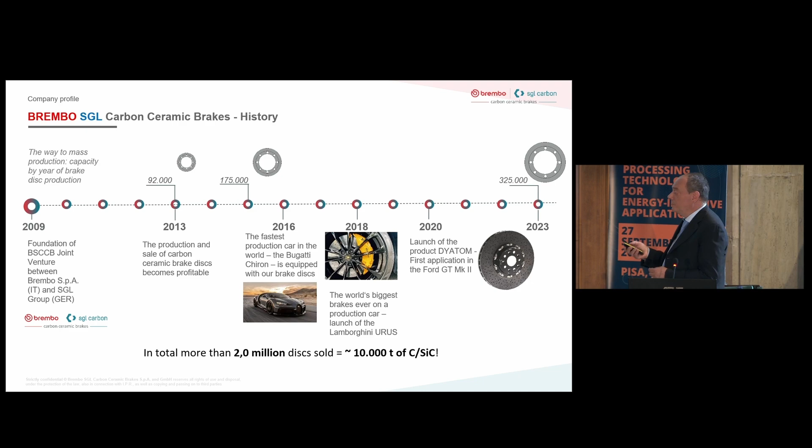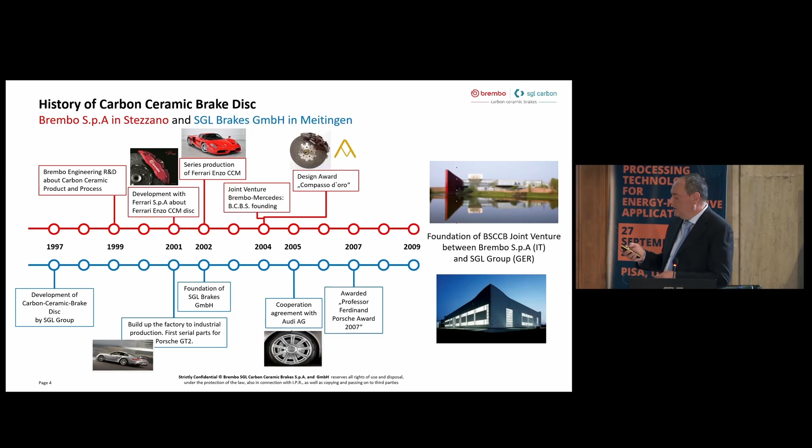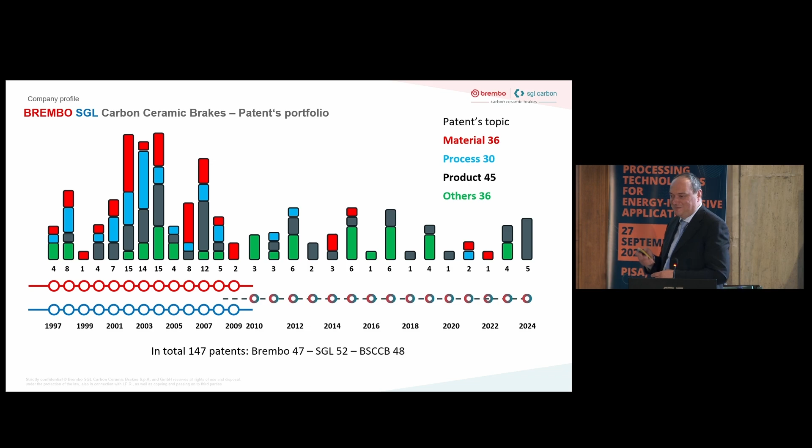Okay, where we are: in Italy, in Stezzano, that is close to Milano, Bergamo, and Meitingen, close to Augsburg, Munich. So these are the two locations. Just to mention, 700 people are working on this material, so not a small company. Our customers are mostly the most important car manufacturers. Obviously, just the top vehicles, and just Ferrari has carbon ceramics as first equipment on all the Ferraris. The others are an option.

Also for Porsche, if you see a Porsche with a yellow caliper, it means that there are carbon ceramic brakes. The yellow caliper is that. So it means if you are rich, you have a yellow caliper. If not, you are a poor rich.

Okay, why do you have to apply a carbon ceramic? First of all, because of safety and performance. Those are the two. Safety is reducing stopping distance due to a higher mu level, more stable, no fading after bedding, longer lifetime. So this is the must.

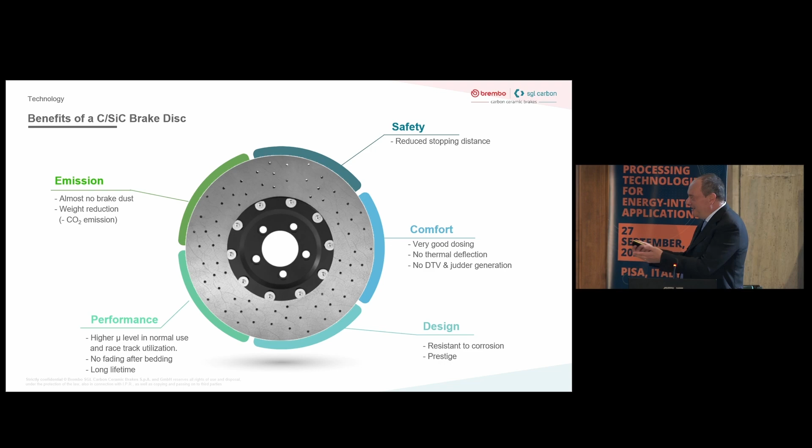And then comfort. DTV is a strange acronym, the disc thickness variation. You have to measure the thickness of a rotor in a turn, and it should be lower than 20 microns. 20 microns over a turn of 400 millimeters, so it's nothing. And if you have DTV, you have vibration during braking. For a Panda it's not a problem, but for a Ferrari, for a Porsche, yes. So it's really important.

Okay, I move to market requirements. Before showing you some news about how we produce it, I want to give you some information about the requirements of the market, because to have a product, as I said, research is important. Then I mentioned Ferrari and Porsche, which were the drivers for the development, because if you don't have a customer, you can have the best idea, but you cannot sell it. It still remains an idea. So fulfilling the market requirements is absolutely mandatory.

And which are the market requirements? Lightweight. We have seen that the evolution will be electric cars. Electric cars have higher weight, but also higher power. So at the end, kinetic energy is increased, and we need to lighten the weight as much as possible. An example, these two Porsches, Turbo S and Turbo, 680 and 550 HP: the weight of the brake system per HP is 60 grams instead of 100. So 40% reduction of the weight means 25 kilos less in the car. And not just weight, but weight on the wheel. Having lighter weight, you can turn better and so on. So it's not just the weight.

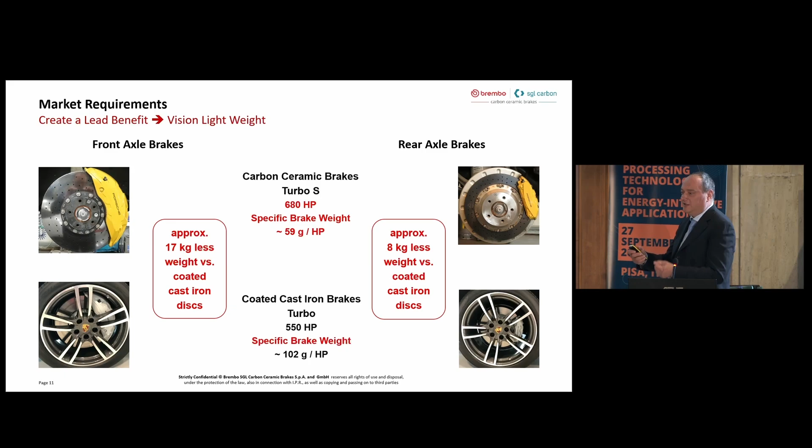Then, what is the use? Standard use or severe use? Carbon ceramic brakes like ours can handle all of these in the same way. So you can drive slowly in the traffic jam enjoying the landscape, but also go to the track and then back without any problem. Whereas if you use cast iron, you have a lot of problems. You cannot move from this to that without changing the brakes. Okay, so the request is to have an excellent product for properties, cost price, and friction couple. What does it mean?

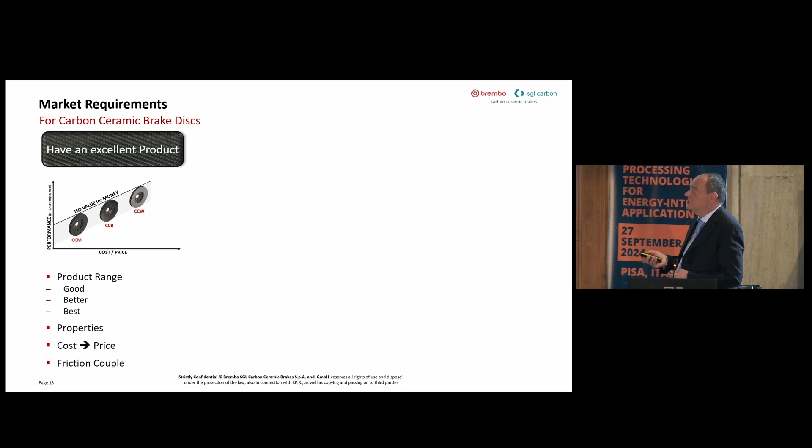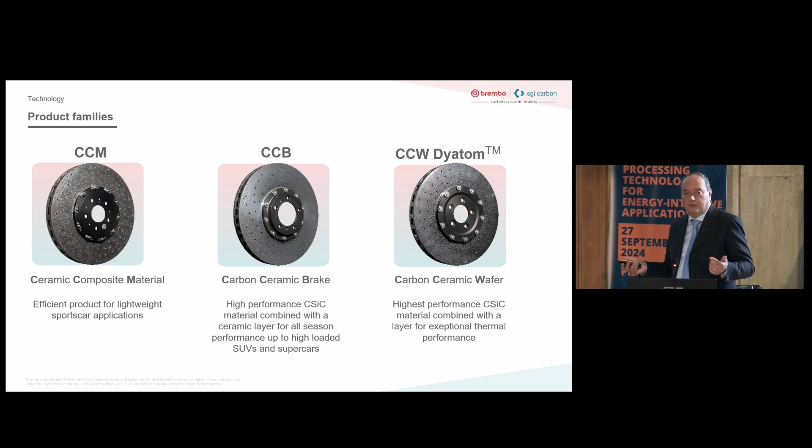To arrive to the request of the market, these two, CCM and CCB, are the starting point of Brembo and SGL. They are different, we'll see the differences soon, and then we arrive to the new CCW Dyatom, because the requirements from the market are increasing. As I said, electric cars need more energy dissipation, which means higher stress on the parts, mechanical stress, and higher heat to be transferred to the air at the end.

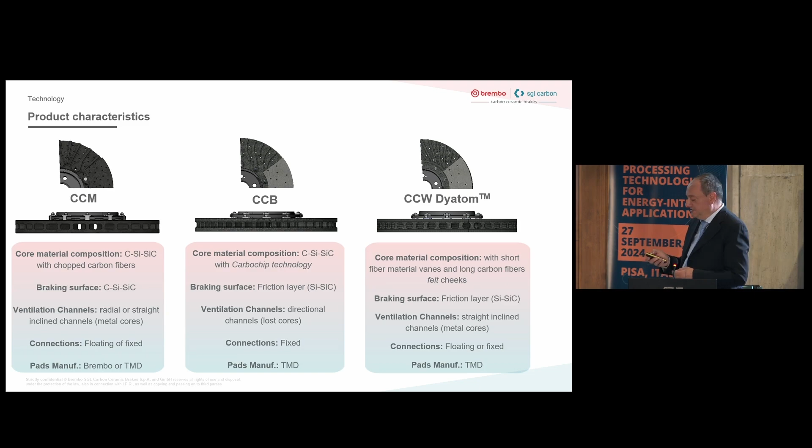A qualitative distribution of price and performance is like that. For sure, as I say, CCM is cheaper because it's the simple way to produce it. No friction layer, metallic pins, so everything is related to reducing the cost. If you want something better, you can arrive to CCB, even more, CCW, and the price is increasing, but performance also follows the cost. So it's not linear, but we have this trend. If we increase the performance, we have to pay something more.

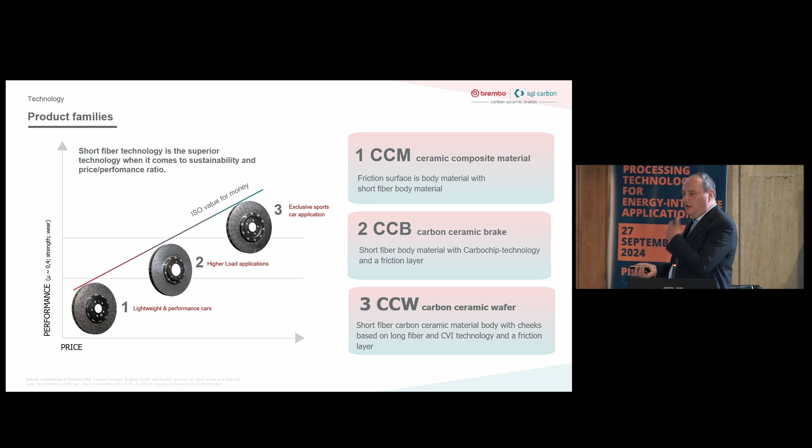Then, friction couple. What is important is that the brake system is not just the rotor. There are also pads and caliper. Especially the pads are really important; here is an example. The same brake rotor and 3 different pads. You can see the behavior in a not so difficult type of braking, a fading test at 0.4 G. Normally you don't brake at 0.4 G, it is like a panic stop, but it's nothing for this type of rotor. From 100 to 5 kilometers per hour.

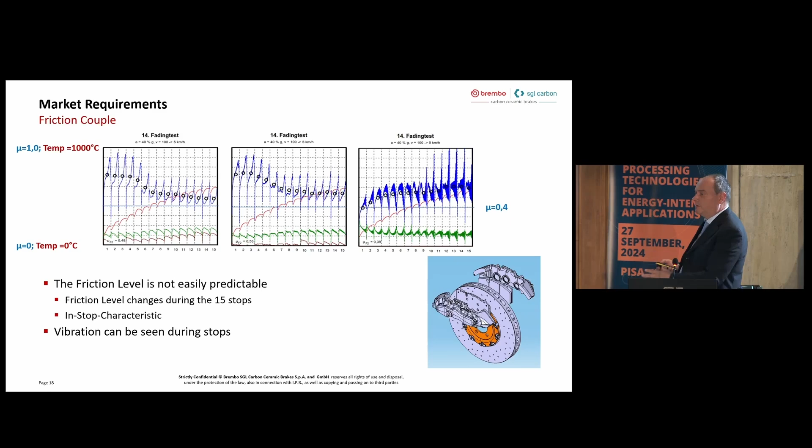So you are on the highway and you have to stop. This is more or less this type of braking. Repeated 15 times, so you can see the increase of temperature is the same. And the behavior, this blue line is the mu, the coefficient of friction, is completely different for these 3 types of pads. So pads are the other part that must be developed together with the rotors. Again, if you can maintain 0.4, this line, it is a good level. So this is what we want to have.

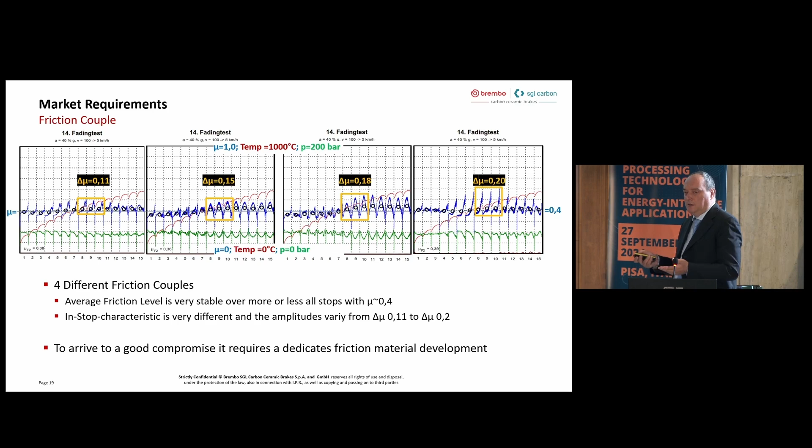Okay, next part for the market request is support to the application. I mean, we have to develop a rotor knowing the energy of the car, the mission of the car, which is the use we want: more related to street use or track use and so on. And so simulation of this part. Simulation of thermal and thermomechanical behavior, let me say, is a given. For sure, we have to design to fulfill the requirements of these parts.

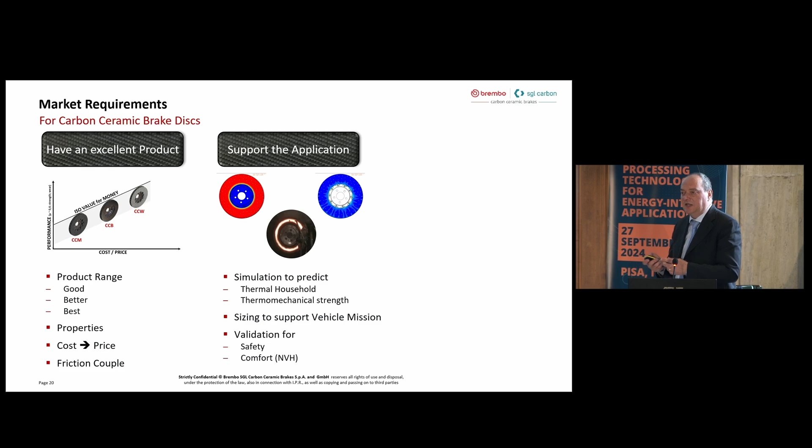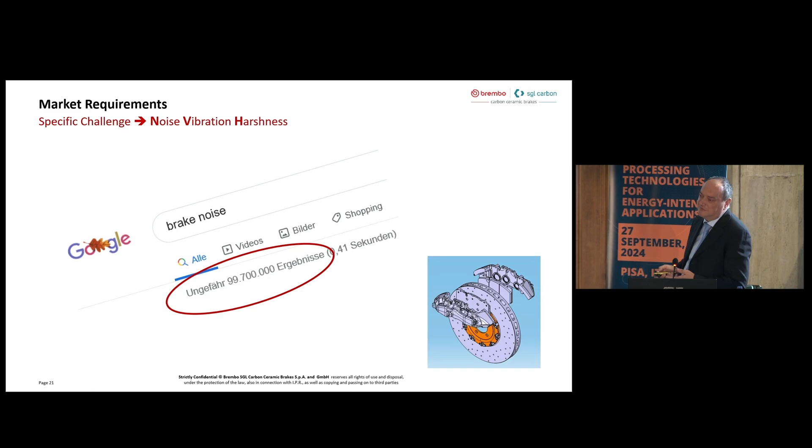What is more important is this part, safety and comfort. Safety, as I said, is the design knowing the mission of the car and the strength of the material, and we combine them to obtain the final design of the rotor. What the market requests more now is comfort. If you Google brake noise, 100 million answers about brake noise. So it's something that is of interest. This is the spread of our hearing and what we have, this type of noise.

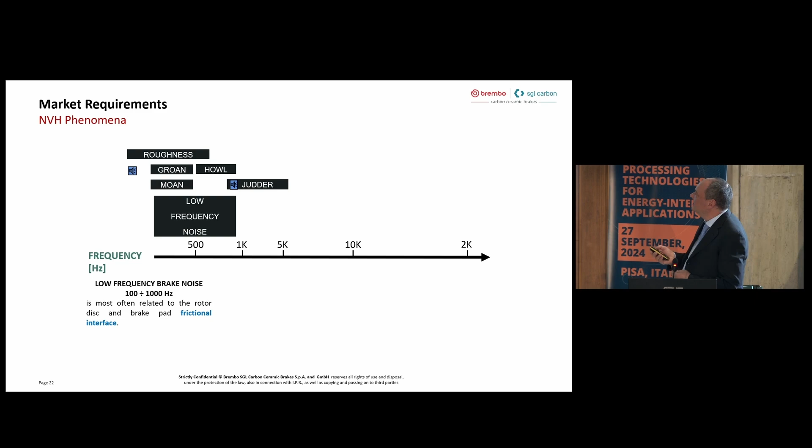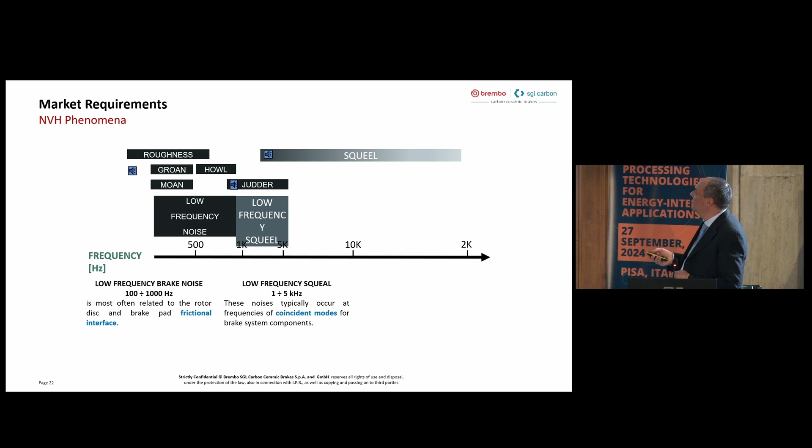Then we have the judder. It's nice to hear. And then we have the area of squeal, low frequency, and then high frequency. Okay. If you brake like this, having spent 200,000 euro, you don't like it. And also wire brush.

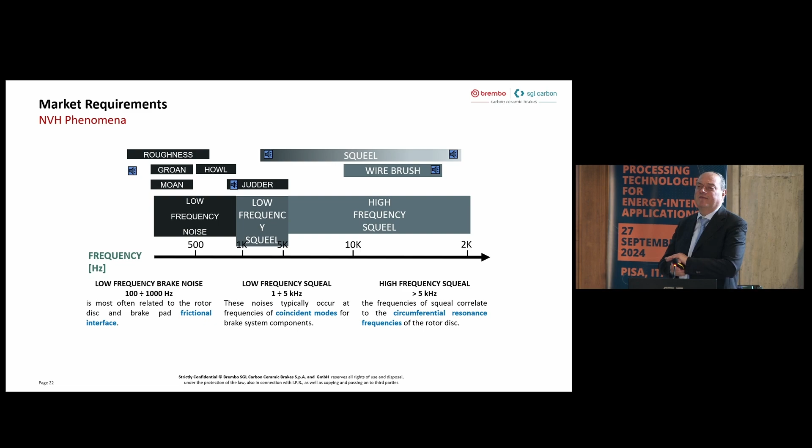Okay. So this is a request of the market. We don't want to have noise. No, just silence. Okay, so we can have also the orchestra, but I think it's clear what is the request. How we approach this with the simulation to understand the origin of the noise. So we have a lot of analysis on that, and so also the design is a part of it.

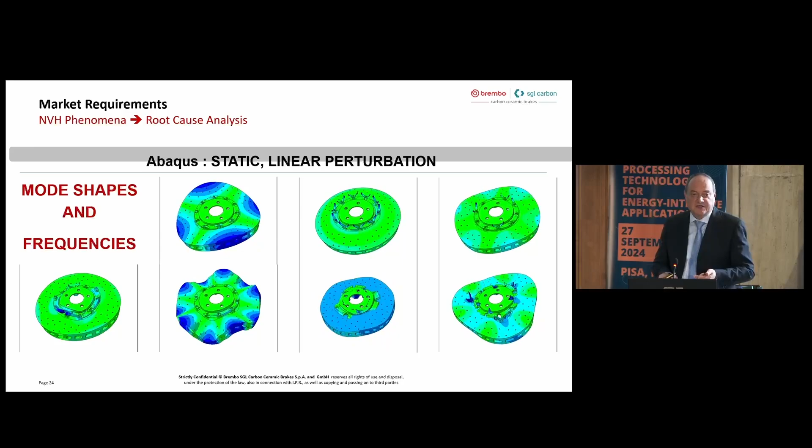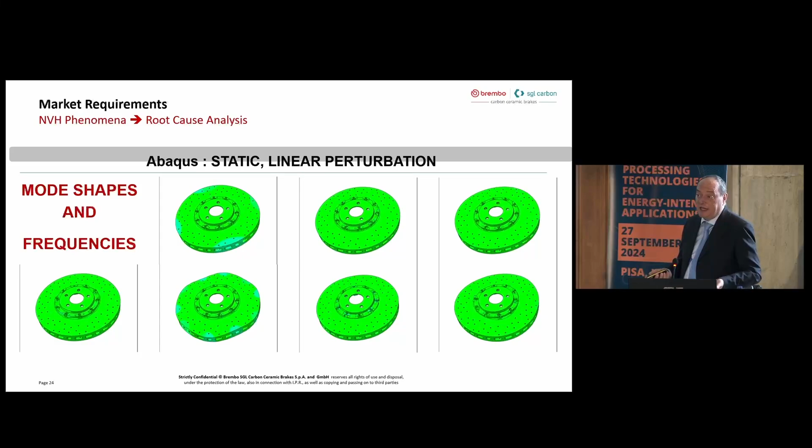So we design for strength, dimension of pads, because we have seen the effect of the pads. We are not obliged to use a certain area for the pads, but also take care about the vibration modes, and can we solve this part by design, by including different type of ventilation and so on. This is a part of our knowledge, and that's what we can offer to our customer. So this is the part.

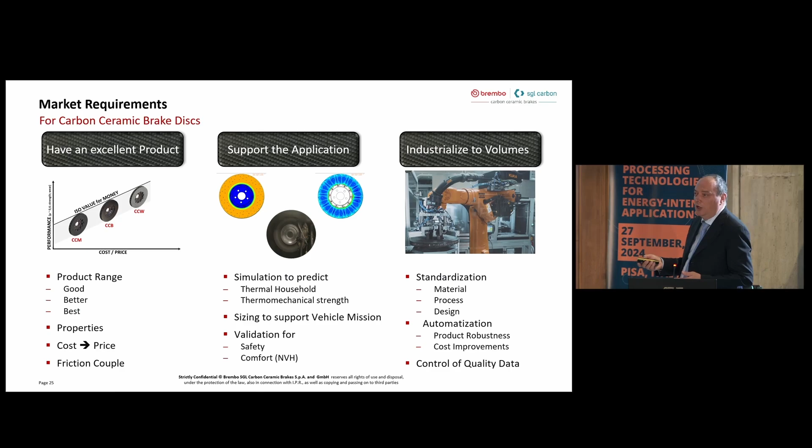Last part is industrialization to volume. Then we have to produce. In which way? For sure, in 25 years we have developed a lot. In the next 3 slides, I want to really summarize how to produce a CCM, a CCB, and a CCW. As I said, CCM is the easier. So you can see not so many steps. We have already seen this several times today.

Material preparation means chopped fiber and phenolic resin, thermoset. So we fill the mold. It's not so trivial because if you have, for example, 60% of volume here, 40%, the ratio is not 60-40 of the weight, but the target is to obtain the same density. Why is it not the same? Because there is the flow of the material in the different areas. We are pressing from the top and not from the bottom. We are heating in a different way. So it's not so easy, and we have to control. So each type of rotor has the recipe for molding.

Then after molding, easy machining, just make the holes, and then carbonization to transform phenolic resin in carbon, and then we have the carbon-carbon material that has to be infiltrated, so batch ovens for infiltration with the silicon, and then anti-ox treatment. As I said, we have surface fibers, and fibers with oxygen are burning, so we can reduce the burning of the fibers, and then the very complex machining. Remember the DTV. So here we have to obtain less than 20 microns by machining a composite, and then assembly and packaging.

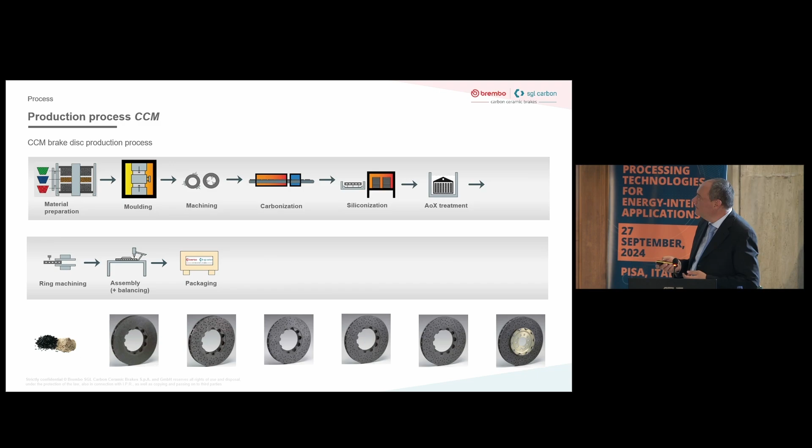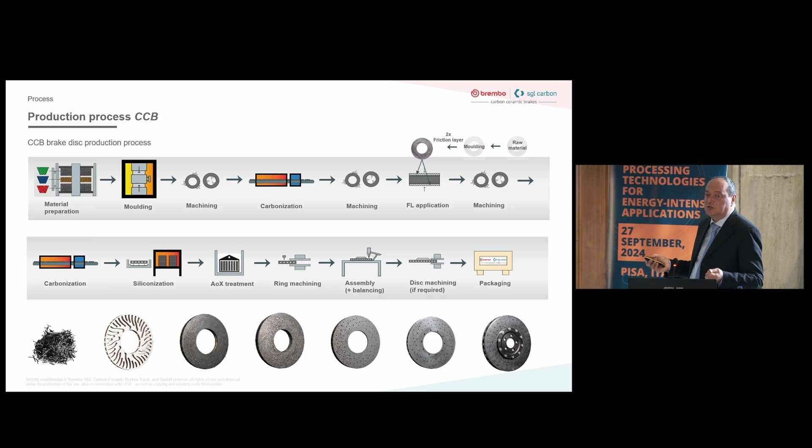CCB, just a visual difference. How many steps more? Friction layer production. We have to produce 2 friction layers that must be applied to the rotor. To apply them, we have to machine before. Flat on flat, we need to have a good bonding. And then machining again, carbonization, because we join it, so we have to carbonize later. So another step here. And then also, because of the requirement of the market, we need to apply to a Porsche, to a Bentley. So sometimes an extra machining is required after assembling with the bell, so everything is well fit.

The next generation is CCW. So this is the production of a carbon-carbon preform that we join by molding with the ribs to produce the ventilation. So this is joined by molding. This is an extra step that we have to produce to have a better material on the surface. Long fibers means higher strength, but also due to the process it has better thermal conductivity. So we increase the strength, we increase the thermal conductivity. At the end, we increase the properties of the material. We increase the cost. I left you the answer.

The same is like the CCB as assembler, we can arrive at the end. But this part is what we can offer as a solution to the request of the market for increasing the power to be dissipated. And this part must be industrialized, let me say.

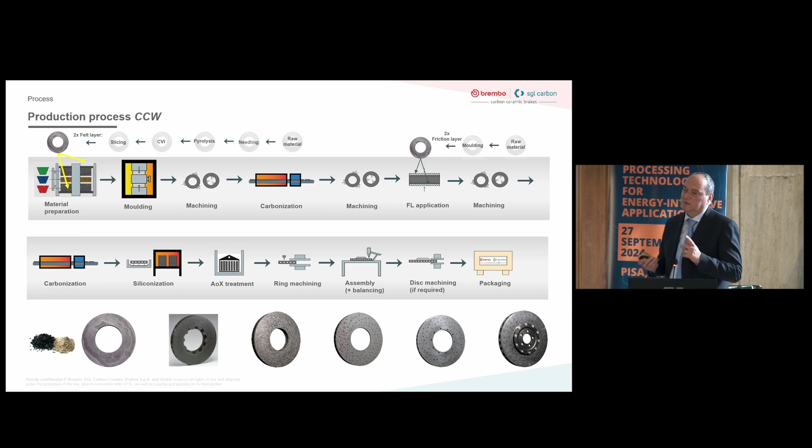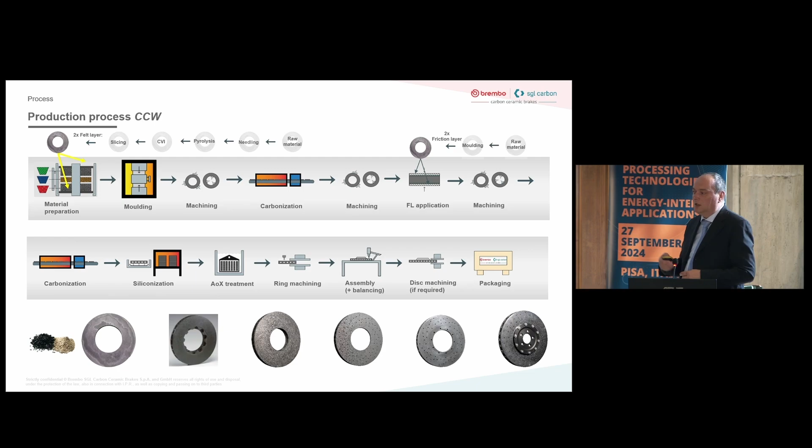Because currently, this is used for carbon-carbon brakes for aerospace application or racing application. Both are not, let me say, industrial, because carbon-carbon for aerospace has been applied for 70 years, but it is different, because here we have to stop at a certain density. We do not have to arrive at a final density of full densification. And so there is a way to produce it in a cheaper way than leaving it for 2 days in an oven, maybe yes.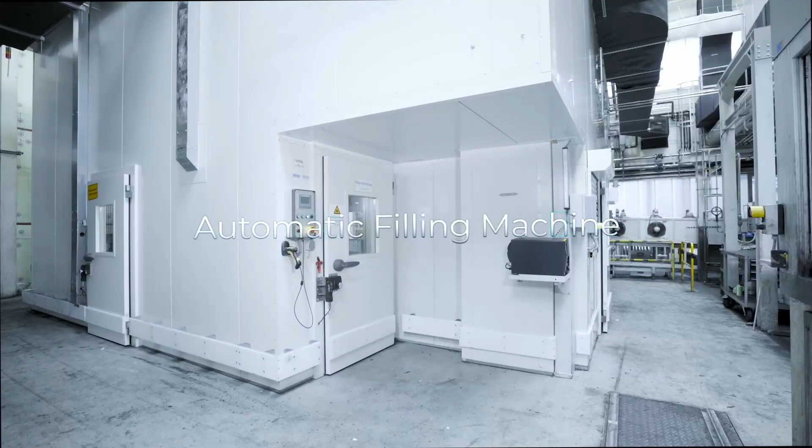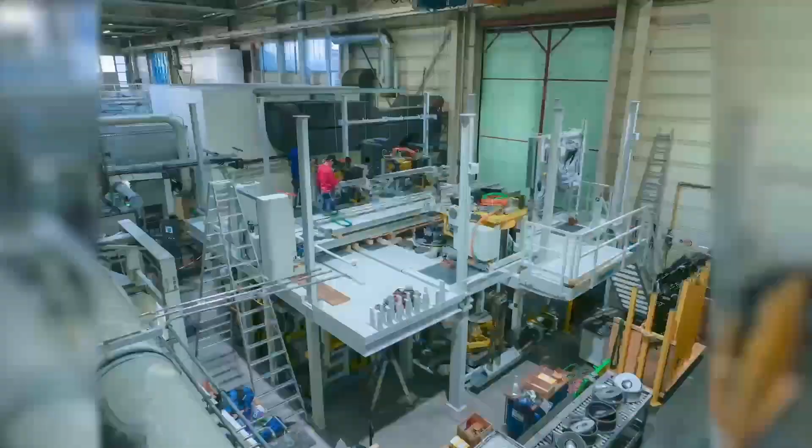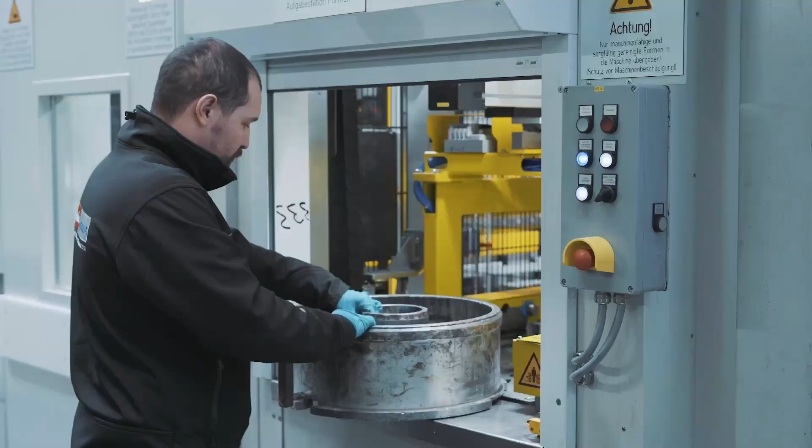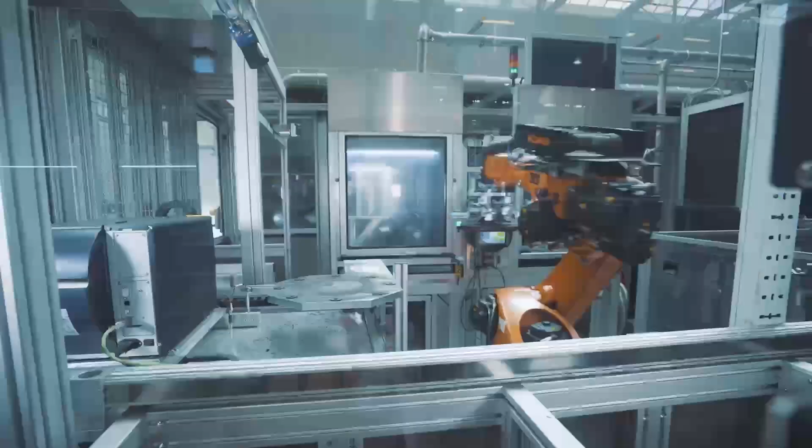Okay, just to give you an idea of the way we grow. We are introducing, for example, this automatic filling machine. This is a machine that we use for CCB. We are very fast to fill it, as you can see, a few seconds and then we have it. But we are investing a lot to develop a process to increase the productivity. We arrived at 325,000 rotors. The target now for this year or next year is 500,000. So this is our growth. And we want to increase also the automatization.

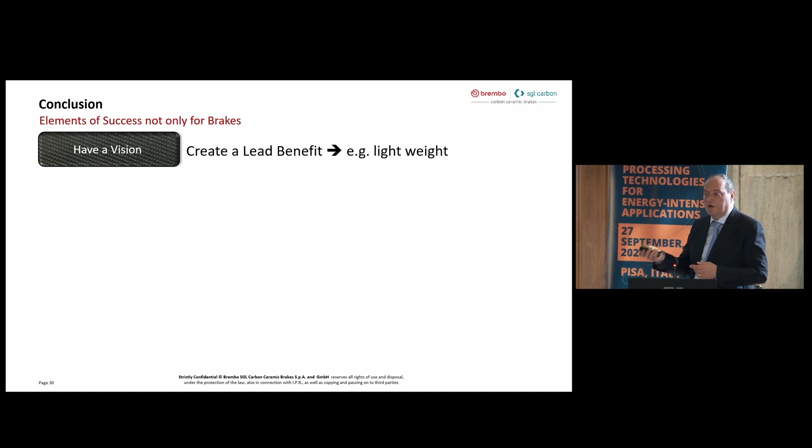Okay, I have just to conclude. What we have? To have a vision. So create a lead benefit, for example, in our case, lightweight. To have an excellent product. Starting with one, we have seen CCM and CCB was one, and go on. Support the application, because, as I said, we need a customer, we need to work together with the customer, we need a pads supplier. We are not producing pads, we are using pads, but working together we can create added value.

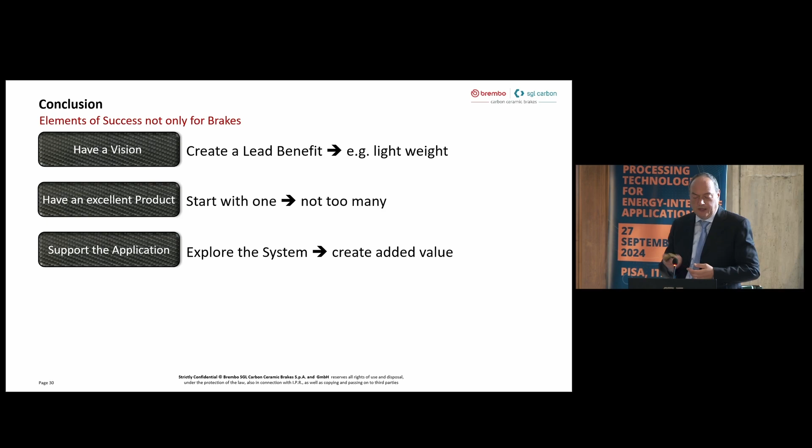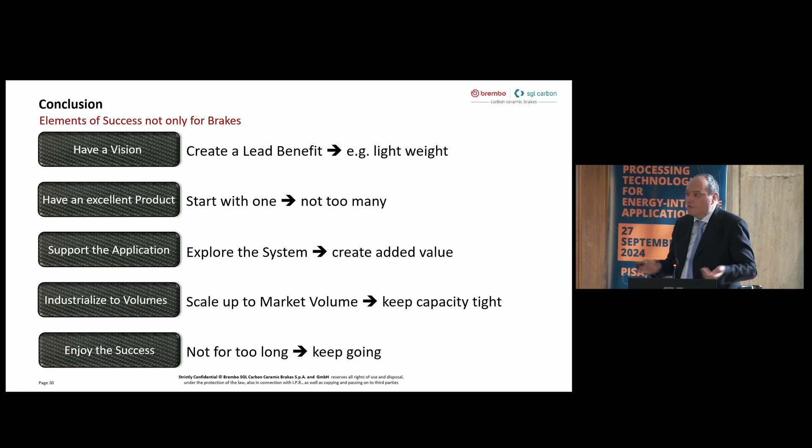Industrialize. This is one of our targets. Scale up and go on that. For sure, enjoy the success. We are in a good shape now, but we are not giving up. We are going on. So we are open, as I said, to work in some area to have the material of the future, the product of the future. Thank you.

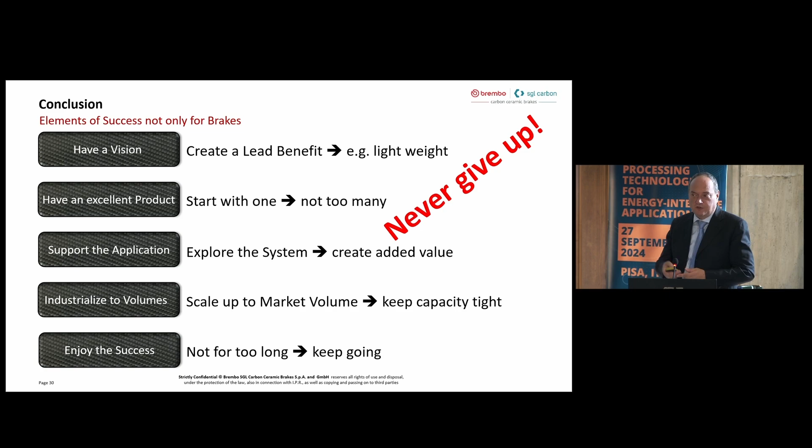Thank you very much for your talk. Any questions from the public? Just to break the ice, as you say.

I have a question regarding siliconization. First of all, what is the maximum temperature that can be reached by a brake during the braking step, maybe for a fast car or a fast train? In use, you normally arrive at a peak temperature of 1200. Normally you start to brake in some simulation or in use on track at a starting temperature of 600, 700, and so the peak is around 1200.

And the silicon matrix is giving you some problems, because I remember from a HELM project that, of course, it's the cheapest method, but cheapest in this market. But I remember that you tried also other methods like polymer infiltration and pyrolysis, maybe CVI also. Do you think CVI could give some advantage to this?